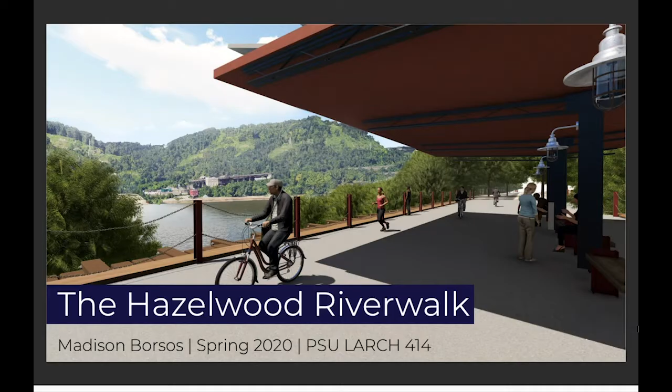I am a third-year landscape architecture student, and today I'll present my design of the Hazelwood Riverwalk for the LARCH 414 Pittsburgh studio. Before beginning design, we completed an analysis of Hazelwood and our study area within the neighborhood, outlined in black. My main site within the study area runs along Tecumseh Street.

On a site visit, I noticed that a small winding path parallels the street and loops at the end. There is currently stormwater conveyance on the site as well. I knew that my designs would need to connect the path to a destination and properly manage stormwater. Other important physical factors are shown in the middle. The study area is flat, so handicap accessibility is possible here.

The elevation is similar to that of the Monongahela River, so our study area would be important for encouraging a reconnection with the river. Although Hazelwood has ample tree cover in other parts of the neighborhood, the study area does not have much vegetation. Finally, the built form of the neighborhood will change as the Hazelwood Green site becomes developed.

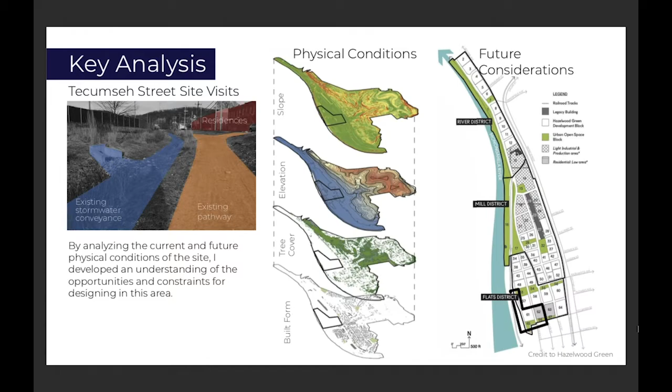With this in mind, I looked at the land use map for the Hazelwood Green development. My designs fall within urban open space lots 65 and 66, and these lots serve as an important shared space between the existing residents of Below the Tracks and the future residents of this development. I wanted to ensure that both groups feel welcome in the proposed designs.

The previous analysis does not provide much information about the people of Hazelwood. Our first community engagement meeting with Rob Stefani, Margaret Bako, and Jim McHugh helped us understand the experience of life in Hazelwood. They spoke about four important factors: people, place, housing, and history. We quickly realized how interconnected these factors are, and it helped us prepare for the community charrette later in the month.

The community charrette provided many design ideas. Here, I've made notes of the ones that impacted my work the most, including the celebration of thresholds, designs for community gardens and nature play areas, organic spaces, and interconnectedness.

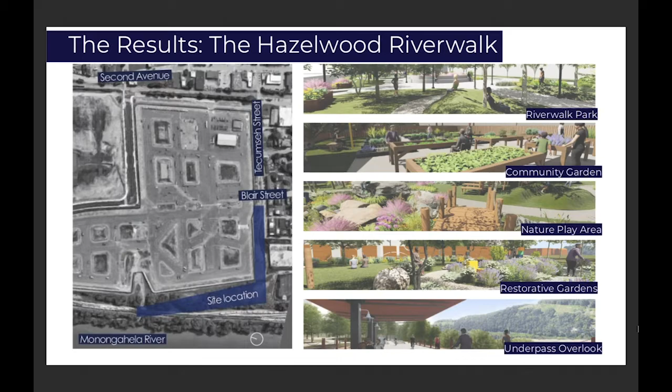As the result of the analysis and community input, I designed the Hazelwood Riverwalk, a winding path to lead people from Below the Tracks towards the Monongahela River. It begins at the intersection of Tecumseh and Blair Street and ends at the railroad underpass at the end of former Hazelwood Avenue. The Riverwalk offers a variety of experiences and features for community members to engage with.

Starting along Tecumseh Street, residents can experience Riverwalk Park, the Hazelwood Community Gardens, a nature play area, restorative gardens, and the underpass overlook near the Monongahela River. I will describe each of these in detail in the coming slides.

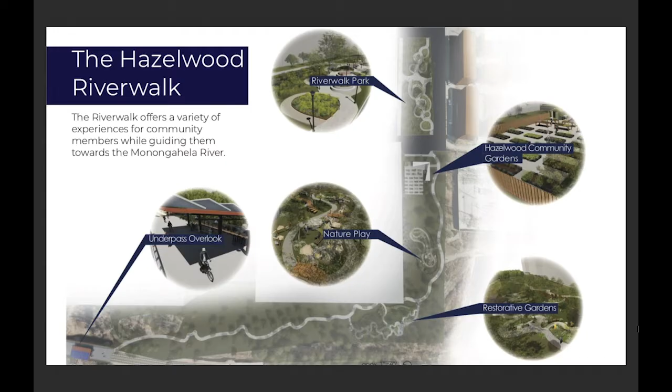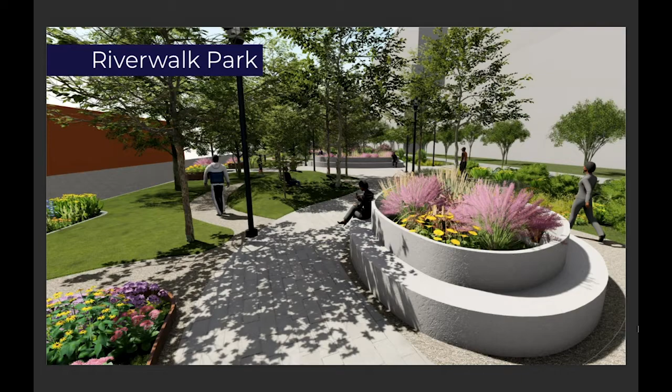The Riverwalk Park serves as the main entrance to the Riverwalk path along Tecumseh Street. Its flowing circulation relates to the existing path in this area, and rain gardens manage stormwater while providing visual interest. Some of the rain garden plantings include blue flag iris, swamp rose, and winterberry shrubs.

The Riverwalk Park offers main paths for moving along Tecumseh Street, indicated by linear pavers pointing in the direction of the circulation. The secondary paths, made out of compacted crushed limestone, allow for meandering. Visitors can choose to sit in the sun on the meadow planters, or they can rest in the shade of the grassy knolls. The park gives its users the opportunity to decide how they would like to use the space.

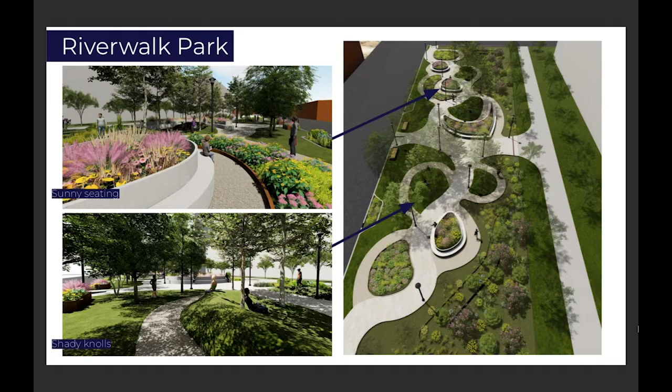The knolls are planted with deciduous trees that provide seasonal interest, such as Winter Orange littleleaf linden and Autumn Blaze red maple. The meadow planters offer a mix of grasses and perennial flowers, including purple echinacea, little bluestem, and others. The lowest planters, edged with corten steel, contain perennial flowers such as bee balm, goldenrod, and eastern red columbine. The full plant list is in the project booklet.

The next site along the Riverwalk path is the Hazelwood Community Garden. This idea came directly from the community charrette I mentioned earlier.

The community garden offers standard planting beds and table height planting beds for gardeners with mobility constraints. The standard planting beds are constructed using dark-colored retaining wall blocks to ensure that there is a clear color contrast against the ground. This increases safety for gardeners with visual impairments.

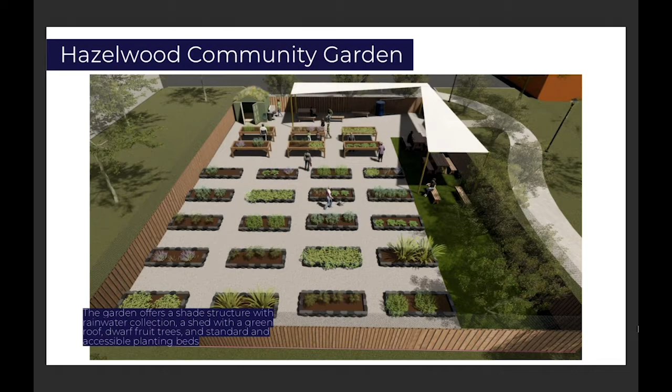There are gathering spaces underneath the shade structures, which also provide rainwater collection. The shed offers storage utilities and a green roof. Finally, there are dwarf apple and cherry trees in the corner for collective use by the gardeners. This image shows how the community garden can be a shared space for use by residents, youth groups, and for educational purposes.

The nature play area was another idea that resulted from the community charrette, and it is the next site along the Riverwalk. It offers a dry stream bed with plantings, a grove of aspen trees, bridges, and wind chimes. An elevated boardwalk winds through the aspen grove to give the children a chance to get up close to the leaves and branches of the trees. They can climb, run, and jump from the structure.

The dry stream bed has rocks ranging from pebbles to boulders, with plants nestled in it for the children to explore. The plantings include lamb's ear, creeping thyme, nodding onion, and northern wood oats to provide sensory interest and texture year-round. The full plant list is available in the project booklet.

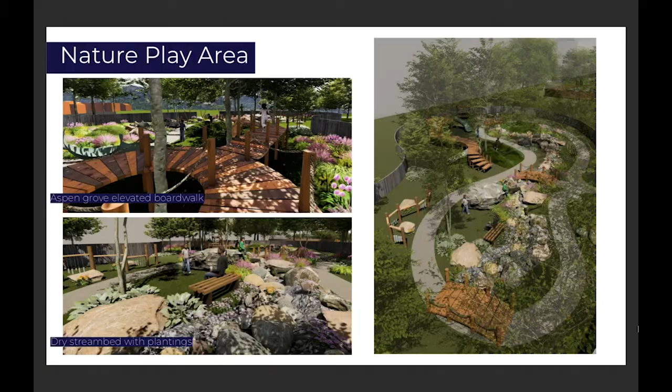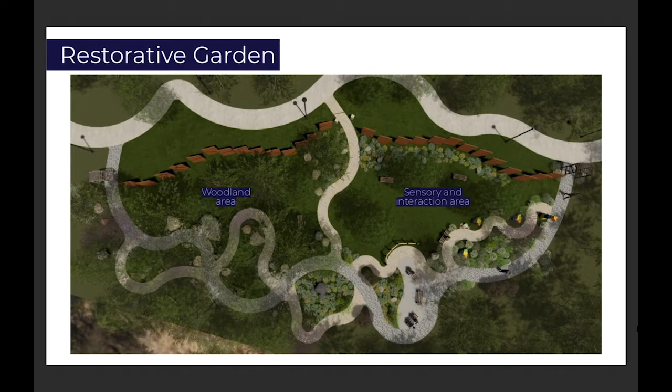The sensory and interaction area has soothing plantings such as lavender, mint, and lamb's ear. There are spaces for local art installations, which are indicated by the colorful blocks as placeholders. The art could be made by local artists and could be interactive for garden visitors. In the sensory and interaction area, there is seating to accommodate small groups and wind chimes to encourage tactile engagement with the site.

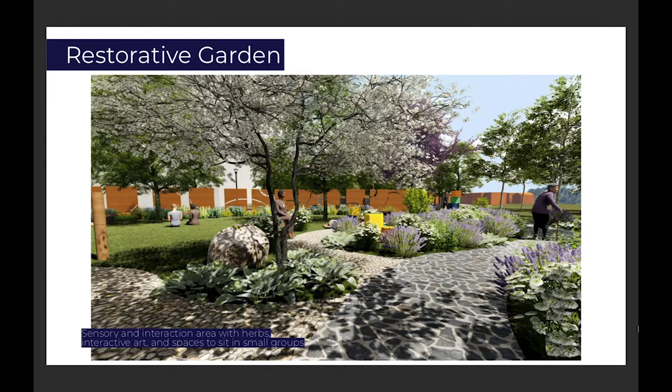The Corten steel screening wall serves as a reminder to step back and look at the bigger picture. From outside the garden, the curves appear disjointed and confusing. Inside the garden, users move farther away from the wall and see it as one piece. From there, it appears as one smooth curve. The screening wall symbolizes how life can seem messy and confusing when we are caught up in it, and sometimes we need to take a step back to look at the bigger picture.

On the other hand, the woodland area offers a sense of solitude and prospect and refuge. The canopy trees create shade so that visitors here can see out from under the trees without readily being seen. The flowering understory trees, eastern redbuds, and autumn gold dogwoods provide seasonal interest. Other natural features such as rocks, boulders, and fallen logs encourage visitors to engage with the organic materials.

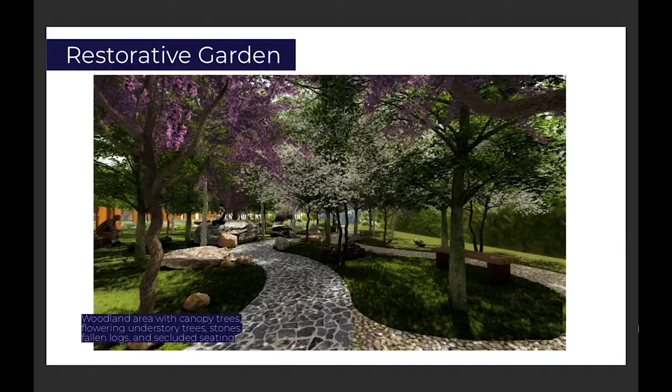The underpass overlook marks the end of the Riverwalk path and the beginning of Bethany Ginhart's rail trail. Bethany's design elements include the railings and benches, and mine include the pavilion and lighting. The overlook has a sweeping roof, which encourages a view out over the Monongahela River. It is equipped with solar panels that power lighting and a charging station to increase safety for its users.

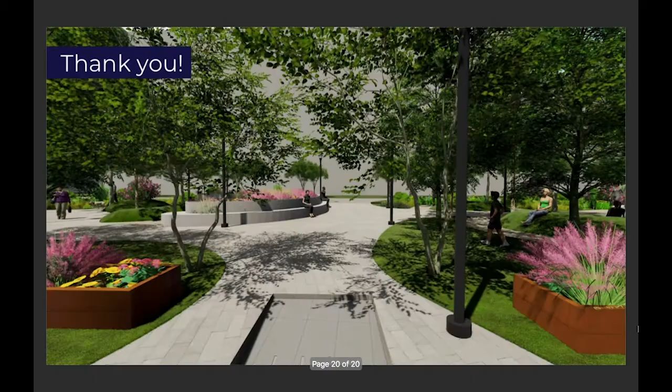Finally, from the overlook, visitors would be able to see the designs along the Monongahela River created by my peers. It serves as a meeting point for all 4 students working in this study area. The Hazelwood Riverwalk aims to guide the Hazelwood residents through a variety of community amenities and towards the Monongahela River for relaxation and recreation.